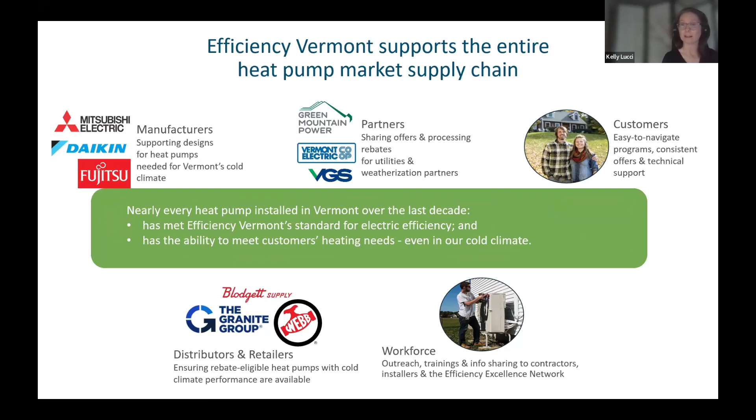So bottom line, because we have this deeply embedded supply chain based program, it means that nearly every heat pump that's been installed in Vermont over the last decade has met a very high standard for electric efficiency, and it has the ability, whether a customer wants to use it that way or not is ultimately down to the customer, but we certainly provide them with the opportunity and a lot of information and support as they consider that option to heat in this cold climate.

Just one last point I wanted to make. Specifically, because it might be a point of interest for folks, if a heat pump is going through this statewide program where we collaborate with the supply chain and with our distribution utility partners, it's going to have a minimum coefficient of performance of 1.75 down to 5 degrees Fahrenheit. And we can dig in a little bit more on the specifics about coefficient of performance. I suspect a lot of people on this call have a sense of that already, but we can go there if we need to as we continue advancing.

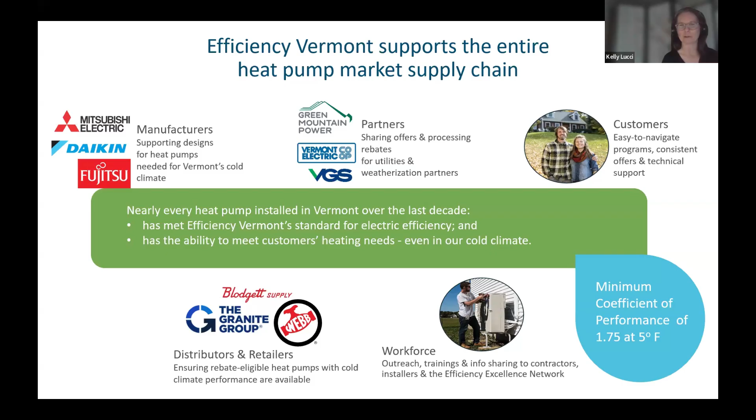Next slide, Cara. So again, just a quick review of where we're at this point. After a decade plus of this statewide program, we've got pretty significant uptake in adoption over those years. We think and we hear from supply chain partners that consistency in terms of how we approach a technology can really help give them the confidence to jump into the market. And it's been very exciting. I think we've seen the market take off for cold climate heat pumps in Vermont in a big way.

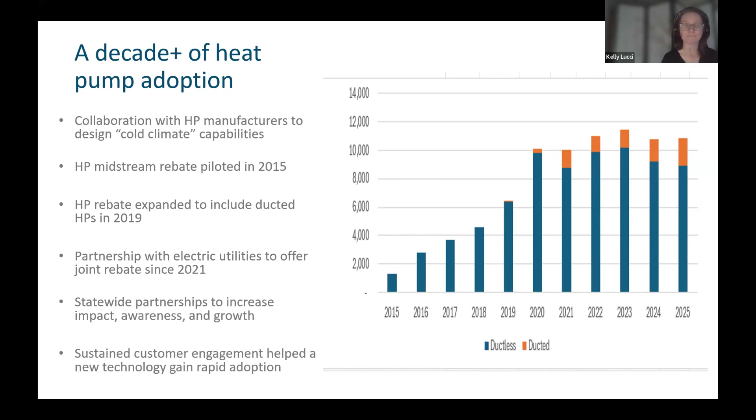And you'll notice on these bars, we're seeing an increasing prevalence of ducted heat pumps as well. So a lot of what I'm talking about here are ductless mini split heat pumps, but we are increasingly seeing more complex installations where those can fit into a home's existing distribution system. All right, next slide, please.

So in our last webinar, Efficiency Vermont shared our Vermont heat pump market assessment. I just shared a little bit of the takeaways from that, just as a point of review. So we undertook an effort with a range of partners to understand what was the state of heat pump adoption in Vermont? What did customers think about it? What were the opportunities to do better? So I shared some of the takeaways on the prior slides, and I just want to land on a couple other key findings from that assessment. So customers generally who have heat pumps are very happy with them.

They appreciate the reliability and the comfort that they offer. However, it was clear too that many of those customers are not using their heat pumps for heating as much as they could. A lot of them were using them for air conditioning, and certainly during shoulder seasons, less so throughout the winter, as we might advise they could. In addition, high upfront costs and limited contractor availability continue to hinder wide adoption, as does outdated housing infrastructure.

Heat pumps aren't the best fit for every kind of housing solution. Certainly, there are a lot of homes in Vermont that continue to be older, have a more segmented floor plan, are not weatherized. That's going to be really challenging for a mini split heat pump. Many homes in the state, I think most prevalently, have hydronic distribution systems, and air to water heat pump technology is still in a relatively nascent phase. So there are some facets of the market that make it challenging to have adoption of heat pumps take off super widely, despite the really great progress we've seen.

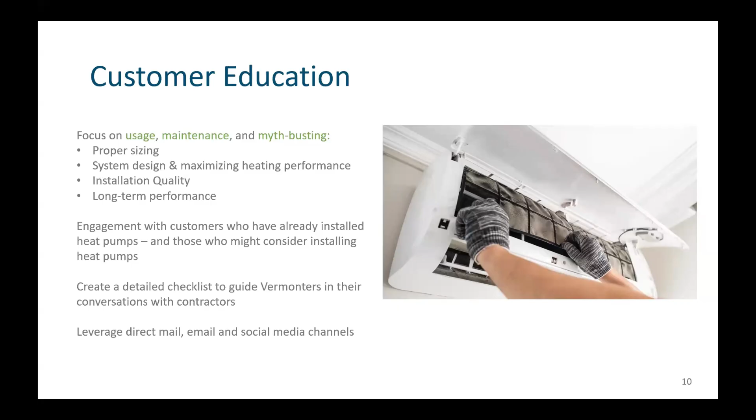So on the next slide, we can focus on contractor engagement. Our team regularly meets with our Efficiency Excellence Network heat pump contractors. We've been talking to them for over a year now about evolving this program, making sure that we bring them along as we consider what this new whole home program would look like, or even just shifting the focus of how we're asking them to speak to customers about heat pumps, but also just to encourage more of the year-round usage.

EEN contractors have an account manager from our supply chain team that they can connect with whenever they have questions or feedback about our programs. So we have this continuous feedback loop that before we make any decisions that will impact how we're promoting or incentivizing heat pumps, we have our contractor partners fully engaged in that decision. And the contractors that we are most engaged with have expressed support for the idea of requiring load calculations for whole home heat pump projects.

And that's something that doesn't always happen with heat pump installations, especially when the customer is just focused on space heating, cooling. So what we plan to do is, throughout this year and sort of by mid-year, identify trainings and tools that will focus on heat pump sizing, for example, doing load calculations, but also tools that help make that work a lot easier.

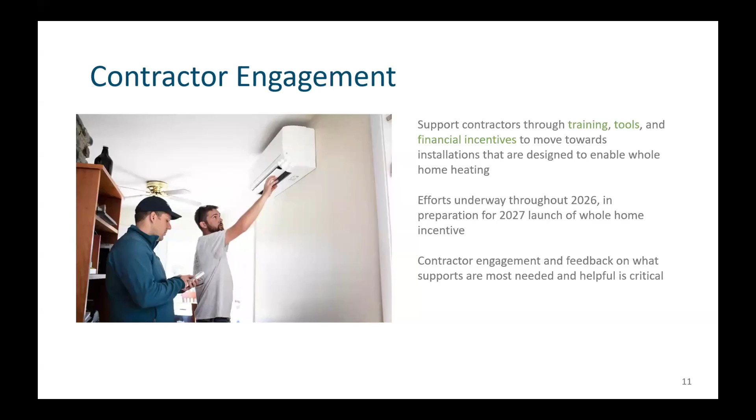So then that brings us to the new whole home incentive. We're still in the very early stages of planning this, but to date, we've looked at approaches that other programs have taken supporting whole home heat pump projects. We'll hear from Efficiency Maine in a bit about their program. We're taking lessons learned from our partners like Efficiency Maine or other programs in the region, and we're going to be applying that to Vermont.

And what we see here on the slide is some of the things that we're already looking at right now, or that are definitely going to happen. We definitely want to do tiered incentives to provide increased support for low and moderate income customers.

We want to layer these onto the existing point of sale rebate, because we want to ensure that there is an incentive for our contractors to be purchasing these from a participating distributor. This ensures that our distribution partners are continuing to supply these heat pumps. So maintaining a base midstream point of sale rebate, and then adding on a downstream rebate that is tailored to that specific project.

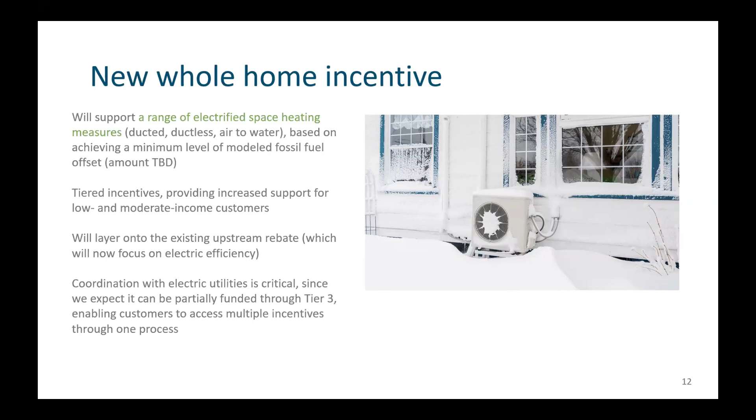Moving on to the next slide. The Heat Pump Action Plan talks a little bit about encouraging innovation as well as accessibility. One way we do this as we continue to track these developments is through our ongoing participation in working groups sponsored by regional energy efficiency organizations such as NEEP. They have a residential heating electrification working group that we participate in.

They've been around for a while, and we've had an air-to-water heat pump rebate since 2019. But we're only now just seeing models available in the market that provide heating water at temperatures that boilers typically produce, so around 160 degrees or higher. Last month, Efficiency Vermont co-sponsored an air-to-water heat pump summit that brought together contractors, manufacturers, and industry experts in an effort to expand the installer network in Vermont.

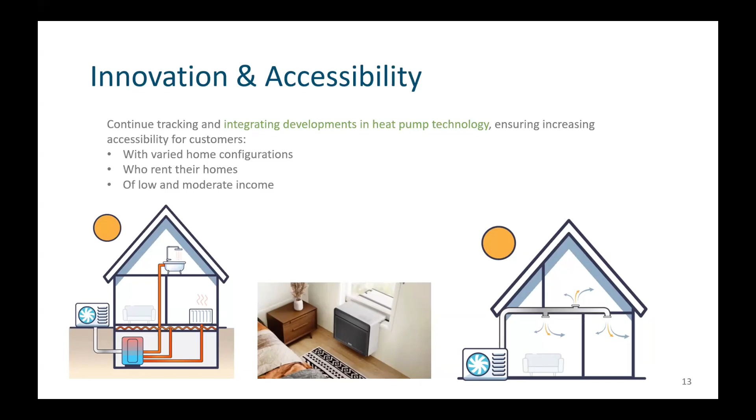And then finally, on the last slide here, we're talking about complementary actions. We're not going to make weatherization a prerequisite to receive the heat pump rebate because we don't want to discourage people or put up barriers to installing heat pumps. As we've discussed, oftentimes the need for cooling is a big driver of doing a heat pump project. So we'll continue to promote and assist people doing weatherization, but not make it a requirement to get a whole home rebate. Same thing goes for integrated controls.

It's been a little bit of a challenge to increase adoption of integrated controls for ductless heat pumps. They aren't a great fit for every home or heat pump install, so we have to be careful how we promote them. Contractors have told us they're a little hesitant to add those to their product line, partially given the lack of familiarity with the technology, and also it's not heat pump equipment. It's a combination thermostat sensor. It could require some light electrical work as well as commissioning the integrated controller and the smart thermostat to work together.

So it's not necessarily something that they would normally be doing, and without a lot of awareness from customers asking for it, they haven't been as enthusiastic about taking on that technology. So there's still more to come. We're still continuing to refine our approach in an effort to help customers with integrated controllers or weatherization, other things that can help maximize the benefits of heating with heat pumps. So that's what we're doing there. And then I will turn it back to Kelly.

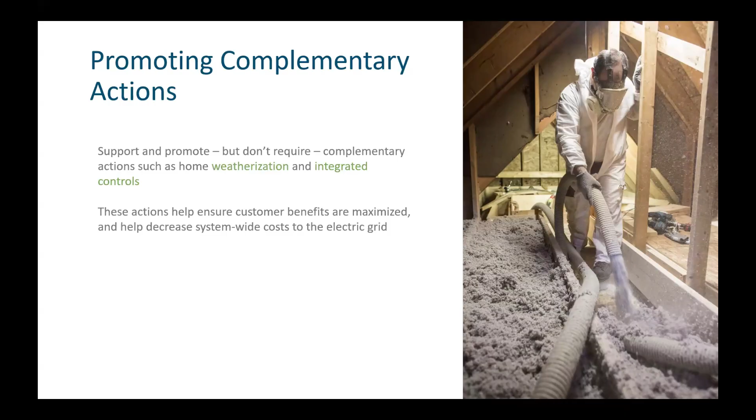Yep. And this is our final slide. And I know we went a teeny bit long, Jared, so thank you for your patience. I'm just going to land it by, again, speaking to those things I tend to get the most questions about externally. So real focus on customer education, both those who've already installed a heat pump and could use it differently or do more, as well as those who are considering it. Focus on engaging contractors because they're absolutely critical to helping support this adoption. And we want to make sure they still feel invested in helping to grow this market and support their customers in using heat pumps differently.

And then, engaging in a sort of two-way feedback, really thoughtful program design process informed by what we're hearing from other states and folks around the region, as well as customers and supply chain partners as we think about introducing a new whole home program in 2027.

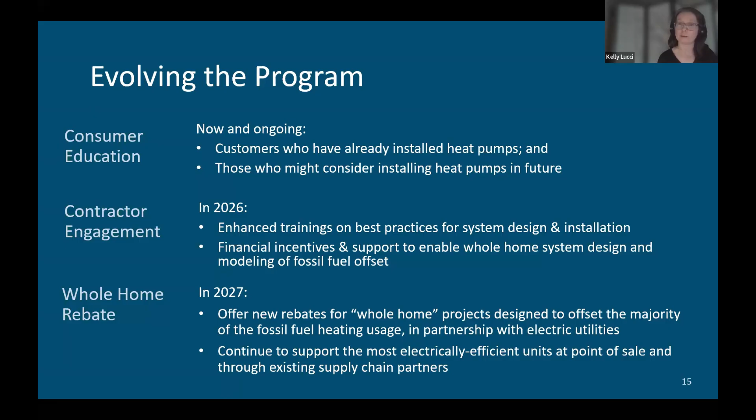So thank you again. Thanks so much, Kelly, and thanks, Phil. Really informative, and happy now to go right over to Nate Gunesch from Burlington Electric Department. Nate, awesome.

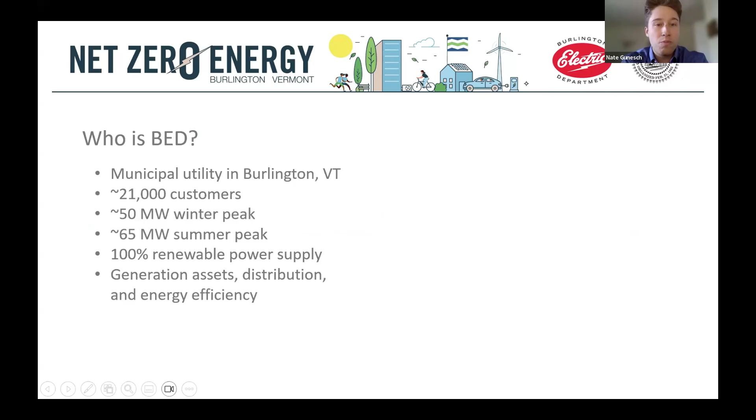So, Kara, if you go to the next slide, I'll just talk quickly about who BED is. BED is a municipal utility in Burlington. I think a lot of you already know that. About 21,000 customers. We have a wide mix of things we do because we operate generation assets, we have distribution, and we do energy efficiency. So, as Kelly mentioned, we have an independent energy efficiency utility just for the Burlington territory, separate from EVT. No lack of collaboration, but just separate from EVT.

And I put this 2030 vision piece here on this slide just to emphasize that the city of Burlington has net zero 2030 goals, and the Burlington Electric Department is really essential to that. We are working hard to help those city goals come to fruition, and this program is kind of part of that. Next, Kara, please. I'll just mention that we have a lot of renters.

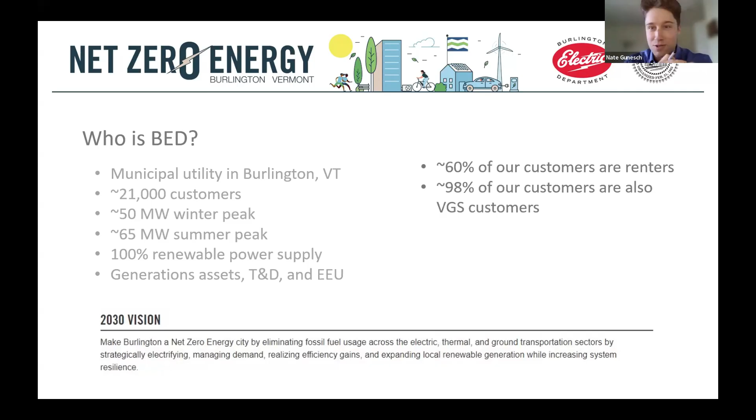And then we have a lot of VGS customers. I think Tim's in this meeting. So, we have a lot of great collaboration with VGS for sure. But it does complicate heat pump adoption. I think a lot of people here are aware that the cost effectiveness of heating with heat pumps is less advantageous when compared to natural gas, all depending on outdoor temp. Don't need to get into that right now. But in natural gas territory, it's more difficult to incentivize full scale heating with ductless heat pumps or any heat pumps.

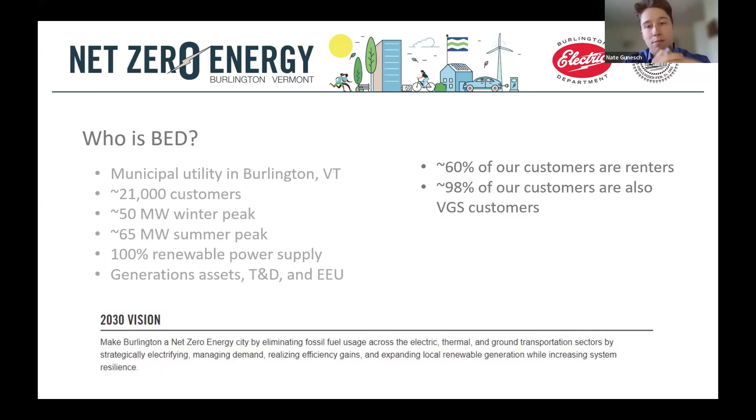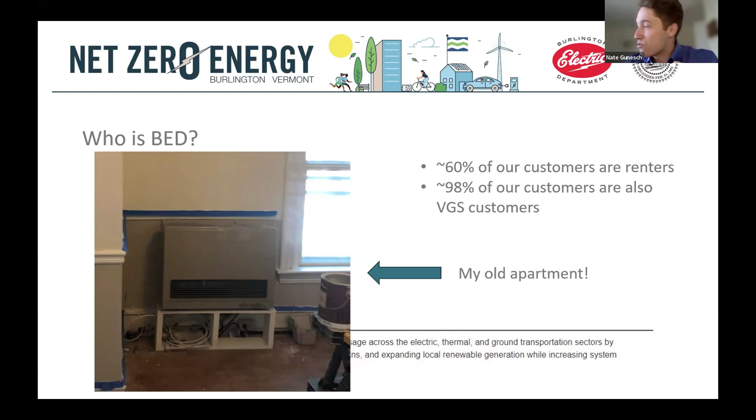And Kara, if you could hit next, please, I'll just show that I used to have a wall-mounted Rinnai natural gas space heater in a rented apartment. There's this kind of thing all over Burlington. It makes it tricky. This isn't super important, but just to ground everybody in the fact that there are a lot of weird buildings in Burlington. They're almost all natural gas. A lot of the HVAC systems are pretty old or not very well designed. So we have kind of a tricky starting position.

Next slide, please. So what is Building Giants, right? I already said what the acronym stands for. This is a program that's supported by a Department of Energy GRIP grant. GRIP is the Grid Resilience and Innovation Partnership. We have quite a bit of money supporting this program from the federal government. We've maintained that funding, which has been great. And this is kind of the core piece, right?

So what do we do? We're promoting flexible load management of distributed energy resources. Flexible load management, for people who don't know, is essentially the effort to move demand from more expensive and higher emitting times of day or times of year based on the conditions on the grid, and move that energy usage into times of day when there's higher solar saturation or other renewables available on the grid. It lowers costs, it increases reliability, and importantly, it cuts emissions. So that's what we're doing when we do flexible load management. A lot of people maybe know about defeat the peak programs or other demand response initiatives. This is just the next iteration of that type of technology.

I'll mention that we have residential and C&I components to this program. I'm not going to talk about the C&I program here, but if anyone has any questions, they're welcome to reach out to me to ask about it. Residential fundamentally is less about specific rate classes or being truly a residential property, and more to make it clear that we're talking about ductless heat pumps, right?

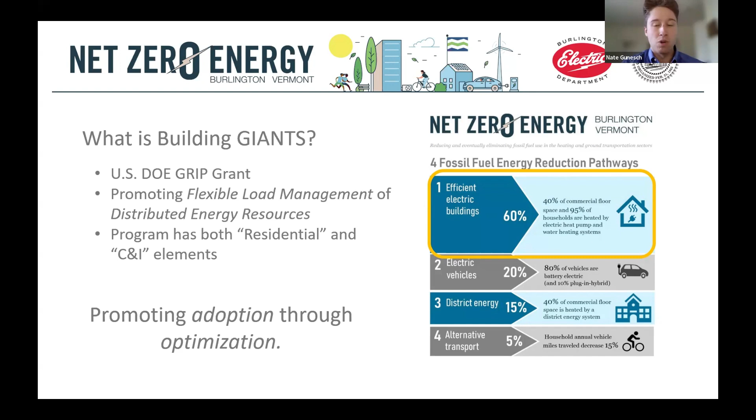Next, please. So, okay, so why are we doing this? As I said, getting into this, we want to support resilience and affordability. For those of you who don't operate in the DU space, the distribution utility space, a lot of costs come from capacity, right? Demand, peaks. These are from the grid operator, ISO New England, the Vermont transmission operator, Velco, also things like transmission and distribution cost. These things like distribution line upgrades or transformer upgrades. There's costs associated with those things that we'd like to avoid, and we can also mitigate the risk of peaks. So we're trying to make the grid more resilient and more affordable generally.

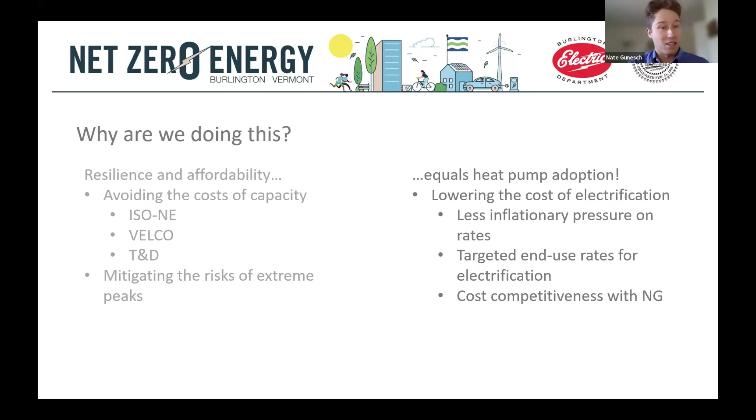Next, please, Kara. Which then can help drive heat pump adoption, right? So we lower the cost of electrification by lowering the costs of capacity, again, by shaving those peaks with flexible load management. This lowers inflationary pressure on rates. I can mention this a little bit later if people are curious about it, but we're considering specific end use rates for electrification. This is similar to our EV rate, if anyone is familiar with that. And ultimately, that can drive cost competitiveness with natural gas, which, as I mentioned earlier, is a key issue here in Burlington for heat pump adoption.

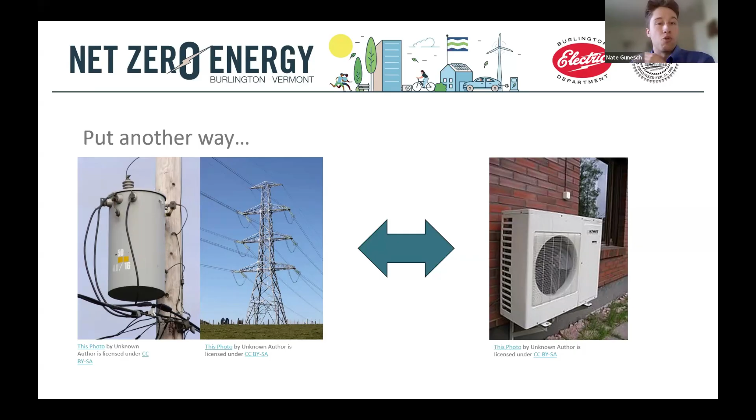This is just a graphical way of describing that, right? We've got transformers, we've got transmission lines. Next, Kara, please. We have heat pumps, right? So when we drive up demand through heat pump adoption, we risk driving up costs in our grid infrastructure, our transformers and our transmission lines. So we want to manage those two things. And if we can decrease the price pressure on our infrastructure, we can keep the rates associated with heat pumps lower, and that can drive adoption.

So, as I mentioned earlier, this is just kind of to give some graphs to show what we're talking about, right? The graph on the left is all of Velco's load last week. The graph on the right is the Burlington Electric Department office, 545 Pine, if no one's been there before. We have behind the meter solar, also just a couple days ago. And you can see that load drops a ton during the middle of the day. This is that solar saturation that I'm talking about. I think a lot of you know about the duck curve in Vermont. But fundamentally, we're trying to shift energy usage from those humps on either end into that core area in the middle, because that helps us save money and ultimately cut emissions by reducing energy usage during those high emission periods.

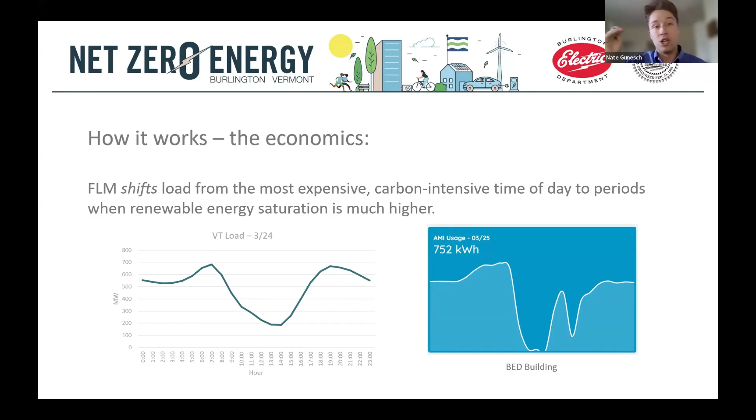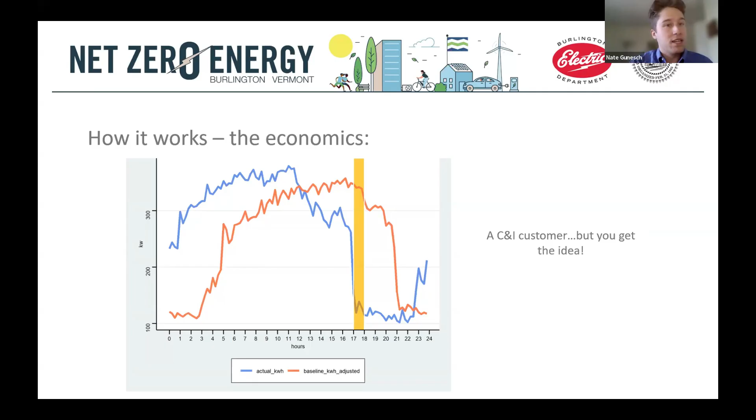This is just another graph to show, I'm not saying which customer this is. This is one of our C&I customers that we piloted previously. But fundamentally, this graph shows the same thing, right? The vertical bar is when the actual grid peak took place. So that's what drives a lot of costs. And what we're doing is shifting actual usage. There's not a huge change. Often there's almost no change in total energy used, but we're shifting when it occurs away from the peak. And on the next slide, I can talk about how that works.

The gentleman in the bottom right, I don't know if anybody here knows Freddie Hall, but this whole program is sort of his brainchild. So I just want to give him a shout out. He cooked a lot of this up. So Freddie, if you're here, thanks.

But fundamentally, for the residential program, it's fairly simple technology, right? We install some kind of heat pump controller. I know Phil just said that integrated controls, there's some hesitancy from installers. So we're pretty hands-on with how this works, right?

We're working directly with customers to make sure that there's a smart heat pump controller installed in people's homes, and a whole home energy monitor to track energy usage, part of our data collection initiative. And then we can remotely request set point adjustments. So moving, generally speaking, cooling load, but we can do this with heating as well, from those peak periods when the grid is the dirtiest into those high solar saturation periods, just through set point adjustments.

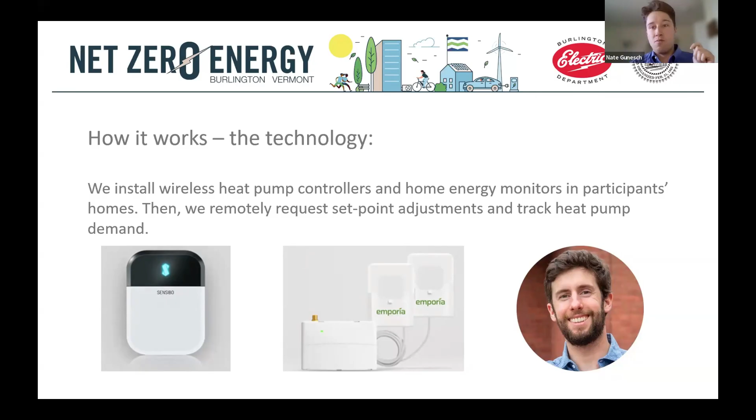Again, if anyone has questions about the technology, maybe I can come back to those in the Q&A session. I want to keep moving along.

So what's next for us? Kelly mentioned being forward looking, right? And also mentioned supporting heat pumps through point of sale. So we're being forward looking in the heat pump market by trying to go beyond point of sale support for heat pumps. So we want to take what we've been doing from a fairly small pilot into a real full-scale program. And in that time, we're hoping to collect a lot of data.

See how our emissions reduction goes by shifting demand on the grid. How much cost we save when we shift away from those high cost capacity periods. We're going to collect a lot of data over the next few years and ideally convert that into something of an electrified heating rate. Again, this is similar to our EV rate, but fundamentally, we'd like to be able to offer lower cost electricity for customers with ductless heat pumps, as long as they're able to participate in this kind of flexible program.

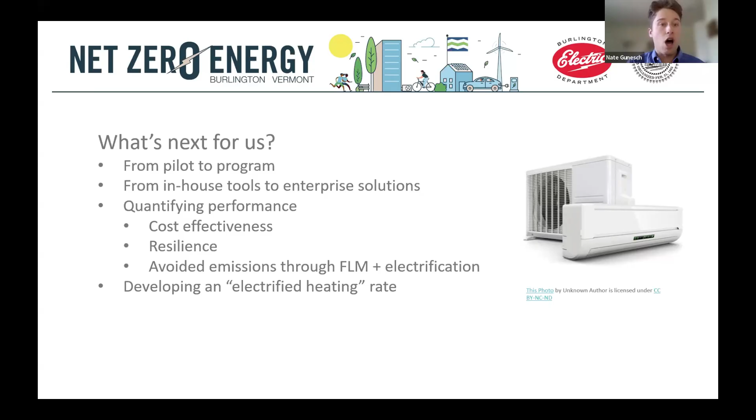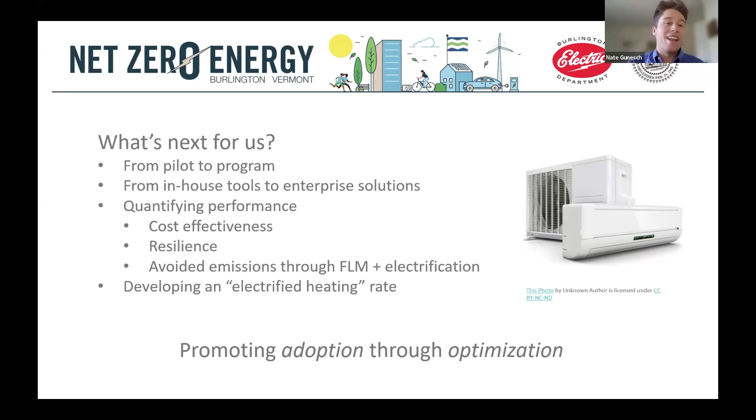So we're thinking long term about how to drive adoption by lowering the cost of operating heat pumps across the board. Next, please, Kara. I'm just reiterating that this is adoption through optimization. So we want to make it so that heat pumps can operate more cost effectively, so we can lower the costs of using a heat pump, and that in turn can spur adoption. If anyone has any questions about the program, you're welcome to reach out to me directly, but this is kind of what BED's up to.

Thanks, everyone. Thanks so much, Nate. And so now we're going to pivot from what we're seeing across Vermont to our sister state of Maine. Bridget Gifford from Efficiency Maine is going to speak. We're thrilled to have Bridget with us. I think there's probably no state that is a better comparison and example than Maine in terms of the similar cold climate, similar reliance on delivered, very expensive, price volatile, and heavily polluting heating fuels like fuel oil and propane. So Bridget, thank you for joining us to share what you've been doing in Maine and what you've been learning.

Thank you so much. Absolutely. So many commonalities. Also, the structure of Efficiency Maine is very much the same as Efficiency Vermont. So we'll launch right into it. This first slide is outlining the previous heat pump program that we had for many years. It was a supplemental heat pump. Folks wanted to offset as much fossil fuel as possible, and the state of Maine would help them do that with a rebate. And we looked into why we were not getting the results that we expected, we weren't offsetting as much fossil fuel as we thought we would.

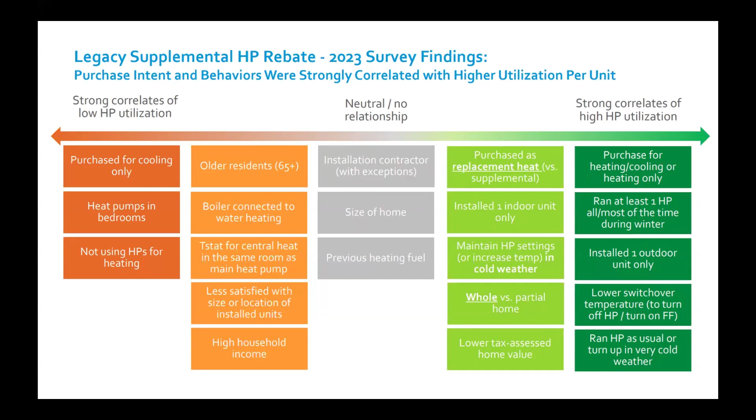And so these are the behaviors we were finding with folks who were not using their heat pump as much as we thought. These were the reasons why: purchased for cooling only, had a heat pump in the bedroom spaces, and just not using their heat pumps for heating whatsoever. So this is sort of the problem statement. This is what we're trying to change. In the interest of time, I'm going to go pretty quickly through my slides. But on the next slide, the key findings regarding the transition.

So right now at Efficiency Maine, all we have is a rebate for homeowners who want to heat their homes with heat pumps. So it's a whole home heat pump program. And some of the biggest takeaways about the transition are outlined here. We're finding that fewer people are turning off their heat pumps in cold temperatures. So that's a huge win. There's a very high correlation between the perceived installer's confidence in heat pump technology and those customers that are heating their homes with heat pumps.

So it is a requirement of the program that you turn your central system boiler or furnace thermostat all the way down and lean on your heat pumps. I'll get into the sizing and things like that later. But we are seeing a big improvement. We're seeing an increase in efficiencies over what we expected, because people are really setting it and forgetting it. They are mostly using single zones. We don't rebate multi-zones. And so there is a higher efficiency to be gained there. So it's been a great story.

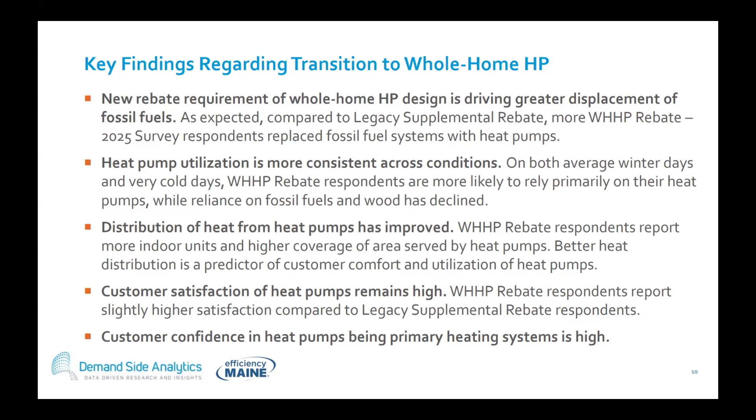And we're getting the result we wanted, but it was a bumpy transition. So I just wanted to walk you through some of those bumps. Next slide, please. These are the 5 levers of success. These are the things that we sort of look to when we're creating any kind of program. And there were learnings in each one of these things. So I've outlined each learning on the next slide, starting off with offering motivating incentives.

So our rebate for whole home heat pump technology is much larger than our supplemental rebate was. So that's a win. The installer community was pretty skeptical at first. It was very disruptive to their business model. And seeing those larger rebates was certainly exciting for them. They just weren't super sure how they were going to make that work. But

we also, under this category, paying the rebates quickly is a very important aspect of the program's success. So as soon as a day's time, getting that claim form into the office and that turnaround and getting it set up for payment very quickly is super important.

Making the program easy. So depending on the income category, we have enhanced rebates for lower income folks, but that's all housed on the same claim form. So it's the same program, it's just that the rebate amount is a bit enhanced if you fall into one of these other categories. And we've got a verification process that happens outside the program. On our website, folks can get income verified.

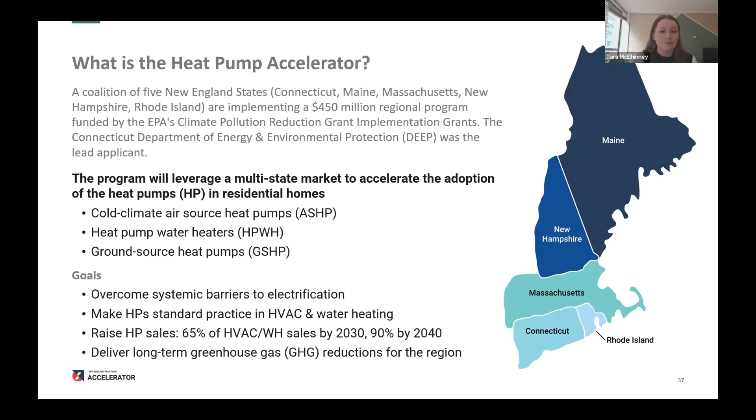And ultimately, this market transformation approach will develop a long-term strategic plan for the region as a whole beyond the program. Next.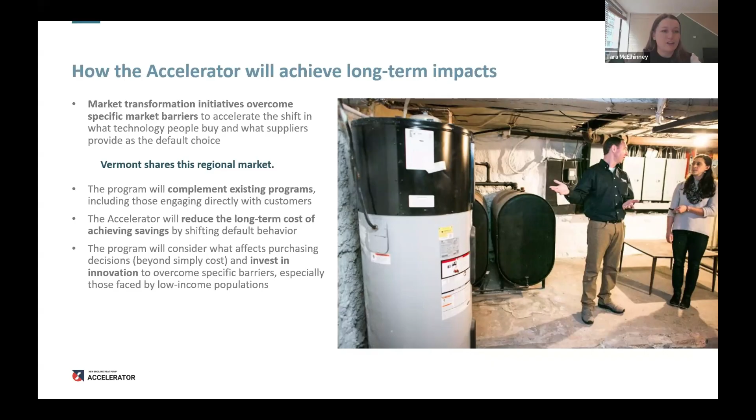All right, so how can we expect the program to have an effect on the market and specifically installation quality and use? We expect the accelerator to achieve long-term impacts by overcoming specific barriers that can shift what technology people are buying and what suppliers are providing as the default choice. And we recognize that Vermont shares this regional market, so these impacts should be felt, including reduction in long-term cost of achieving savings and shifts in behavior throughout the supply chain. Next, please.

Next slide, please. So next, the Innovation Hub will be testing and deploying scalable strategies to heat pump adoption barriers. And these could be in technology, program design and delivery, customer outreach and targeting, and financing, just to name a few. So each state will have $14.5 million in funding to deploy 1 to 2 pilots in their own state based on their specific priorities and the barriers they're aiming to overcome.

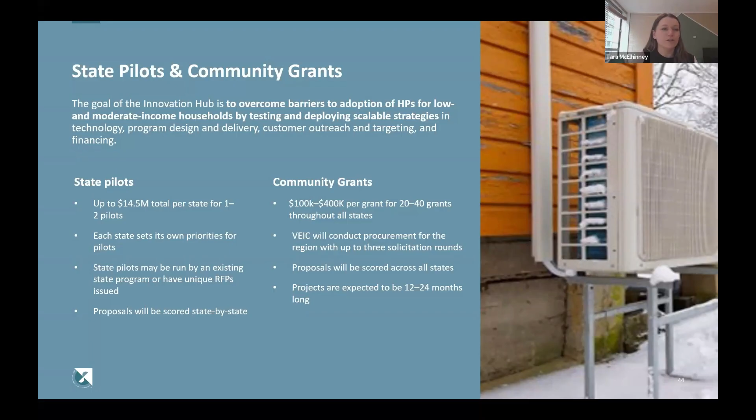Next. And finally, data and insights is where Vermonters should see a lot of benefit as well. The resource hub that I mentioned before will be an accessible website that acts as a centralized resource for stakeholders, providing program information, transparency around the program performance and learning and impact. So this will include data visualization from both program data and full category sales data, which the region has been trying to get for the past few years, but there's been a gap.

Maps, reports, and case studies to learn from, and plenty of resources to help trade professionals, policymakers, and community orgs address challenges, including heat pump installation and use. It'll also have annual program status reports and annual evaluation reports that will yield useful program learnings and regional insights. Next.

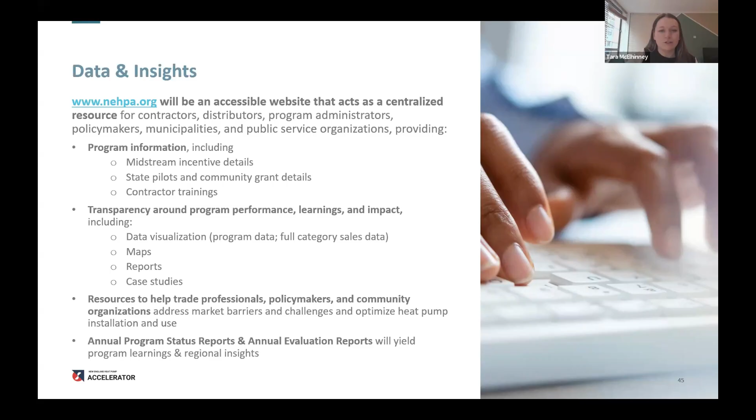So if Vermont is not formally part of the accelerator, what can Vermonters do with this? Next. So I'll highlight a few things to keep this regional momentum and provide consistency that several of the presenters mentioned for customers and market actors. Vermont may consider aligning with standards set in the accelerator states where appropriate. For example, in equipment eligibility specs or training curriculum.

Next, learning from all the program data and resources from pilots, from the market data, so you can see how it's changing, where it's going, and understand where Vermont can plug in to complement efforts and improve their own. And plenty of educational resources will be available.

And then finally, staying updated and engaged. You can sign up for monthly newsletters at the bottom of the program website linked here. And also, when you see any engagement opportunity, these are not always limited to coalition state actors. Your insights and thoughts are really helpful across the region.

Vermont is part of the region, so while you can't directly apply for the funding, you should be able to provide input via surveys and RFIs and the like. So I encourage you to take advantage of the changes to the regional supply chains, workforce dynamics, and watch for shared challenges and wins. And thanks again for the opportunity to share this overview. If you have any questions, my contact info is on the next page.